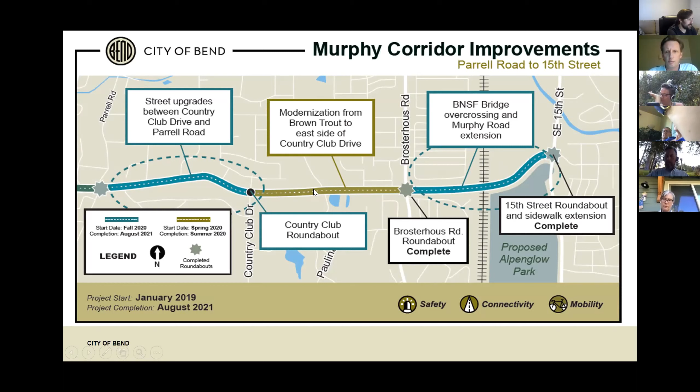Very, very wide in scope with a number of components that are not only individual and distinct, but also, based on the way the progressive design build team has decided to actually construct the project, certain pieces are sometimes split between different construction packages. So one of the terminologies used in progressive design build, or PDB, is guaranteed maximum price, GMPs. Those are essentially the construction packages used to stepwise through a project to get it designed and constructed. Generally those GMP packages were selected and recommended by the PDB team to essentially build the project in a fashion that hopefully minimizes disruption, but also makes sense in terms of the sequence of construction for the overall project itself.

So what you'll see as far as the scope of the overall project are some of the sub-projects that have been completed and that you're aware of, and also the current one that's ongoing, and then the future one that was just approved by City Council last Wednesday, which is the 5th and final guaranteed maximum price, GMP 5.

So you'll notice that GMPs 1, 2, and 3 are completed and are shown as the roundabout at 15th Street, excuse me, the roundabout at Brosterhous Road, and not shown is the first GMP, which was some early work that we coordinated with the school district on 15th Street. GMP 4 is currently ongoing, shown in the brown color and labeled as the modernization of Murphy Road from Brown Trout to the east side of Country Club Drive. I have some slides a little bit later in the presentation that show the progress of that, but it's currently ongoing and scheduled to be completed late this summer.

And then GMP 5, which is the 5th and final GMP for the project, includes 3 really important components. The first, planned for construction, is the roundabout at Country Club Drive and Murphy, shown with a dark black circle at that intersection. The second is the modernization of Murphy between the existing roundabout at Parrell Road and the new roundabout at Country Club Drive. And the third, really the keystone piece of the entire project, is the extension of Murphy Road between Brosterhous and 15th Street, between those two new roundabouts. It includes the extension, which you've seen over the course of the last year, with fill being placed for the road extensions on either side of the railroad, and also the actual railroad overcrossing bridge over the railroad.

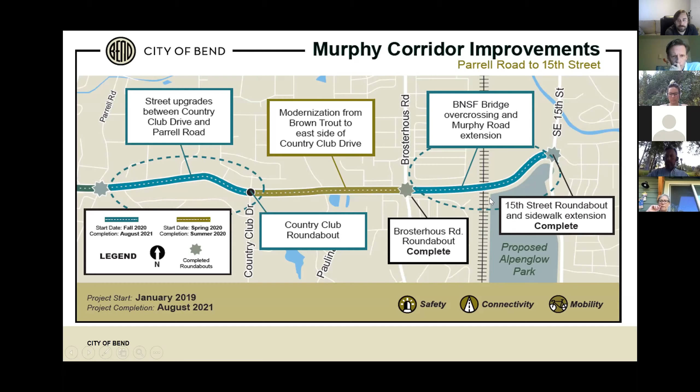The benefits for the project: it's intended to significantly improve emergency medical services and fire response times in critical neighborhoods in Southeast Bend. There's a lot of change going on in Southeast Bend, and we wanted to be at the forefront of improving safety, connectivity and mobility in that area. The keystone piece, the Murphy overcrossing and extension between 15th and Brosterhous, is key to that. It's fully funded in our transportation plan, and GMP5, the last and final GMP for the project, was approved by council last Wednesday.

Question: Is this going to include any part of the sewer extension project on Greenmont or that area? Are you referring to the septic to sewer program? Yes. There is a very small piece of the septic to sewer program where we overlap, which is the extension of the existing sanitary sewer connections along Murphy Road, extending them to meet the wider right-of-way resulting from the modernization of Murphy. Thank you. You're welcome.

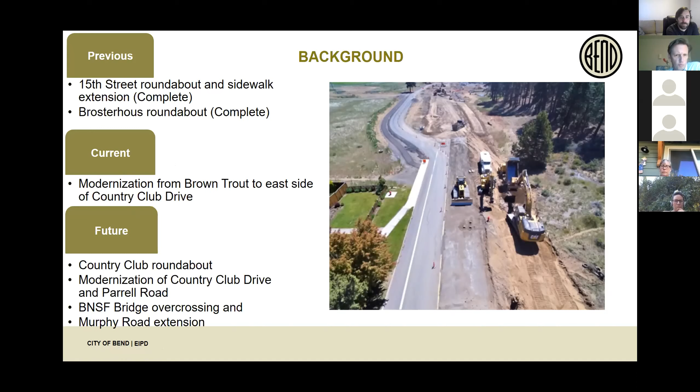Just a little more background. Previously, the two roundabouts at 15th and Brosterhous were completed as part of earlier GMPs. The current modernization of Murphy Road is ongoing between Brown Trout and Country Club Drive. I mentioned earlier the future construction: the Country Club roundabout, modernization of Murphy between Country Club and Parrell, and then the overcrossing of Murphy.

Completed improvements - just a couple of quick photographs. The photo on the left is the 15th Street roundabout, and the photo on the right is the Brosterhous roundabout. You can see the extension to the east, slightly east of the existing roundabout, which will be the extension for Murphy Road towards 15th.

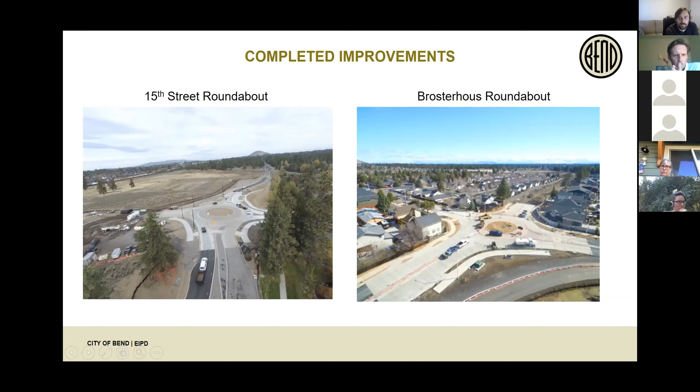A couple of aerial photos taken on Friday, July 31st, just before last, showing the modernization of Murphy Road between Brosterhous and Country Club. Paving is starting to be installed, and sidewalks, curbs, and curb returns for some on-street parking are installed. This photo on the right shows the existing temporary construction detour for that portion of Murphy. There will be a similar situation for the Country Club roundabout construction - that area will be restored after the temporary detour as part of GMP4, removing the detour and completing the improvements to Country Club. I drove through last week, and I think if you drive through now, they are doing some utility work on the west end of that portion of the project before paving can be completed.

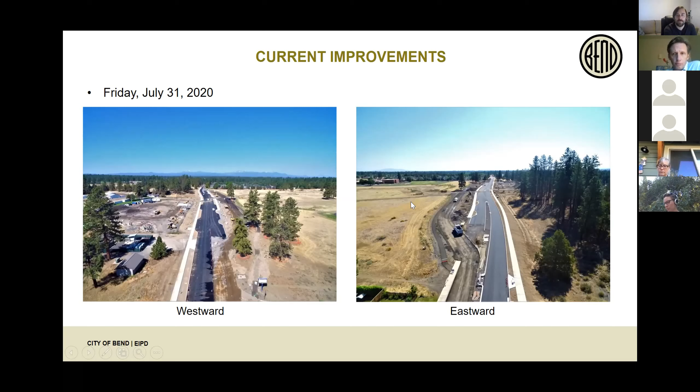GMP5 is shown here in 3 separate slides for the 3 separate components. First is the Country Club roundabout - planned to be a concrete, single lane roundabout. Note that north on this graphic goes to the left, so Country Club goes north-south but is shown crosswise here. There will be a temporary bypass road installed, with a full closure at Murphy and Country Club to facilitate construction of the roundabout. A shoofly, or temporary bypass road, will be constructed on the southeast quadrant of the roundabout, shown there with the callout.

Construction or preparation for that detour should be happening any day now, so you should see some activity out there - that's related to the bypass road construction. Part of this roundabout also includes the extension of the sidewalk on the west side of Country Club Drive to the intersection with Fairway, so sidewalks will be extended and curb ramps installed opposite the Country Club itself.

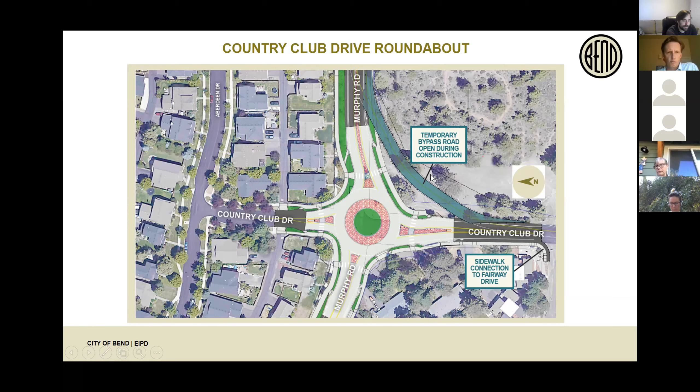The second piece is the modernization of Murphy between Country Club and the existing roundabout at Parrell. This shows the extent of those improvements. It'll be similar in that it's a 3-lane section along that stretch, including a 2-way center left turn lane, with shared use paths on both sides of Murphy Road. On the north side widths vary from 8 to 10 feet, slightly narrower at 6 feet on the south side. Lighting will be installed at each pedestrian crossing at each intersection, so each intersection will include pedestrian crossings and lighting.

There is a protected pedestrian crossing just east of Benham Road, which my understanding is the study indicated would be the location of highest pedestrian use. So that was located just east of Benham Road, and it will also be well lit. It then shows on the east end how it connects over to the Country Club roundabout.

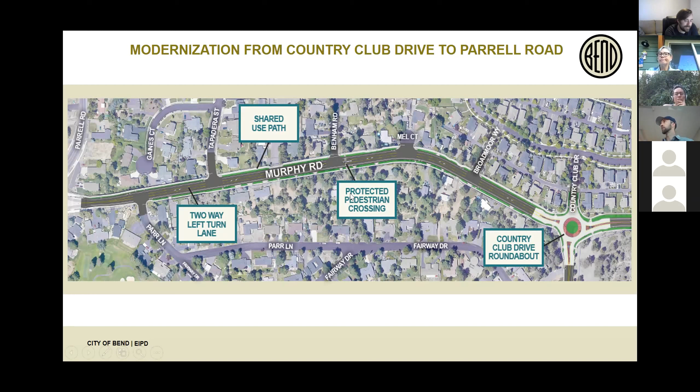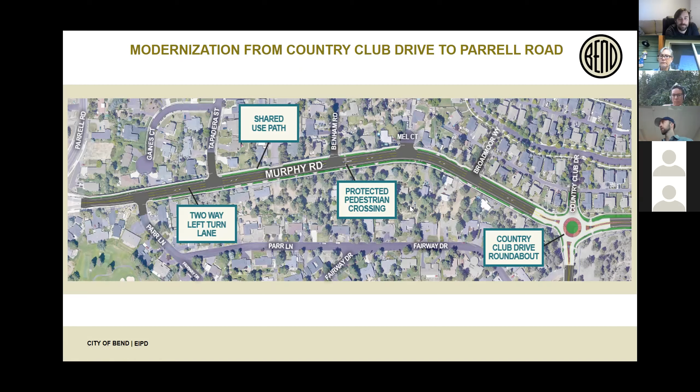Good discussion. This is why we come to these meetings, it's important to get feedback from the folks that live in the neighborhood. We're not afraid to take those tough questions. I'd like to think we have people like Garrett who can offer that long-term perspective over the whole course of the project, and we landed on a good solution.

I think I might have been done talking about the Murphy extension and bridge. I have some things I'm excited to share with the neighborhood association, 3D renderings of some of the components, particularly the bridge. I think I have 3 bridge slides, and I wanted to share these, I'm pretty excited to share them. I think they're great visualizations.

I will say these are based on an incomplete design, so again, that's the nature of the beast with progressive design-build delivery. Things change as we get towards construction and even during construction. We'd like to think these renderings show the character of the improvements that are going to be constructed; otherwise we wouldn't share them. There might be slight adjustments here and there, but I was more excited to share the slides than to hold back just because we're not at 100% design.

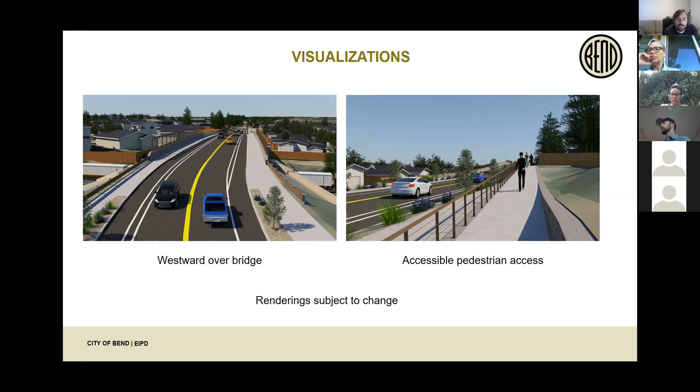To the right is the accessible pedestrian path, access to the Hidden Hills neighborhood that I talked about earlier. This is a view looking eastward, up the ramp that connects with the sidewalk, essentially where the person took the vantage point for the rendering. On the other side, to the east of the ramp, is a staircase, so those who prefer to use stairs have that option as well.

The third rendering I wanted to share was an east-looking rendering showing again the top of the bridge, wide sidewalks, buffered bike lanes, the train crossing underneath, and some space to the east for a potential future Bend Parks and Recreation District path. It also shows the large fill that gets the road up to grade as it goes westward from the existing roundabout at 15th Street, and the gravel road I pointed out earlier for access to the existing southeast interceptor manholes.

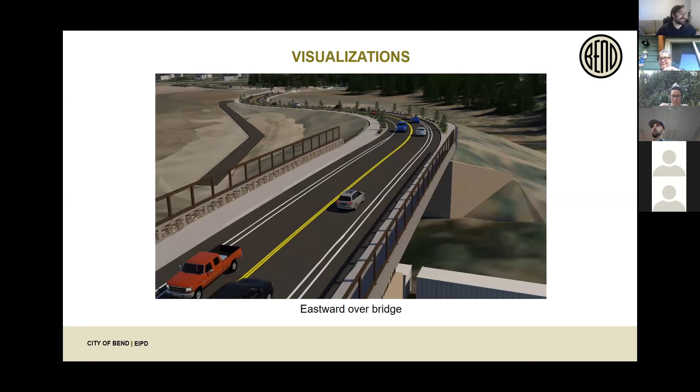We've got a couple more comments. Kent mentions that the roundabout at Brosterhous is pretty tight for his pickup truck, which speaks to that being our future expansion point, I think. Nancy mentions that a 15-mile-an-hour speed sign should be posted before the Brosterhous roundabout. Does anyone else have questions?

I think so. The first question about the truck, both those questions were about the Brosterhous roundabout. Is that correct? Yep. Yeah, and that's kind of the yin and yang of roundabouts.

So they're designed to limit entry speeds and exit speeds so that people aren't going too fast through those roundabouts. Really the most efficient design for a roundabout is one that allows all legs to enter on a fairly equal basis, if possible. And if speeds are too high, you'll get a preferred leg that'll establish a line of traffic through there that, due to speed or volume, precludes other entry points from working very well. So by design, they are designed to limit the entry and exit speeds for the roundabout.

Which also means that the turning radii is one of the ways engineers accomplish those limited speeds. Quite frankly, those two questions are a great example of the feedback we usually get at roundabouts, that either the speeds are too high or the corners are too tight. So it is a balance between those.

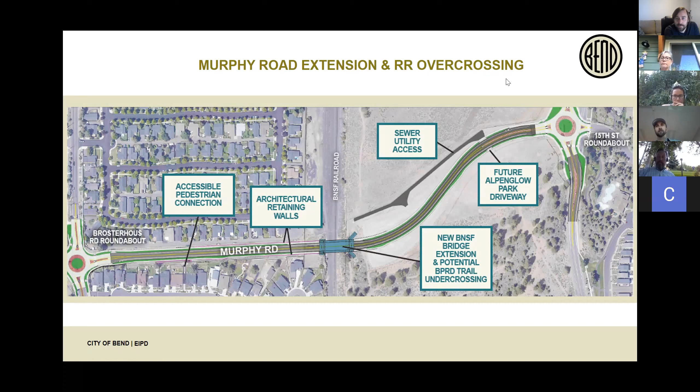We've got a few big things. First up, treasurer's report, nothing really major there. We spent $120 in the past month on Facebook advertising.

That was connected to the 4th of July fireworks safety signs, and we did that in a way that created awareness around the signs and helped us get people to sign up for the newsletter and participate in our meetings and everything we do here. It's really a drop in the bucket. Our current balance is over $12,000, so we plan on doing some more online outreach and engagement and putting some money behind the efforts as well.

Part of it is we want to do some diversity outreach as well, so it's not the same beautiful faces that we see here every time. We want to be a little more strategic about that, and we have the support of the board to spend money to make that happen. But this past month, nothing really major to report aside from that.

I was hoping that Karen, our land use chair, would join. I don't see her on the call, so I'll try to summarize some of the things here. I'm going to go ahead and share my screen. We've got a few items, so let me pull this up real quick.

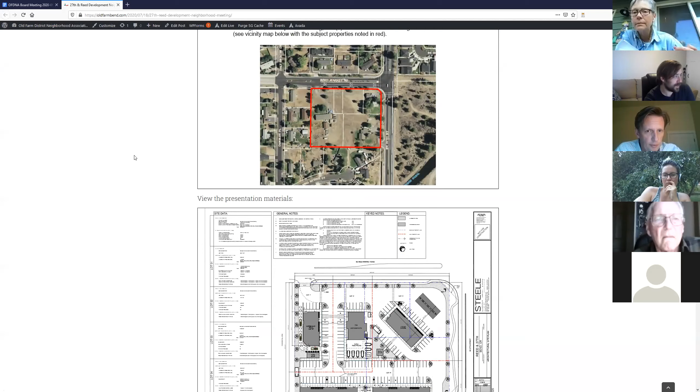This is the lot at the corner of Reed Market and 27th on the southwest corner. That is one of the very few lots that is zoned for commercial development in all of the southeast, apart from the expansion areas, like the elbow and such. Pretty much we have that, something on Murphy, the American Lane stuff, and there's not much commercial opportunity at all in our area. So this is one we all kind of expected to be a gas station.

It's going to be a gas station, along with some other things. From the looks of it, it's kind of like over on the west side where the bottle shop is - there's a gas station and a little complex of a tiny strip mall in there. This is something similar to that, with a little strip of some other services like a drive-through coffee shop.

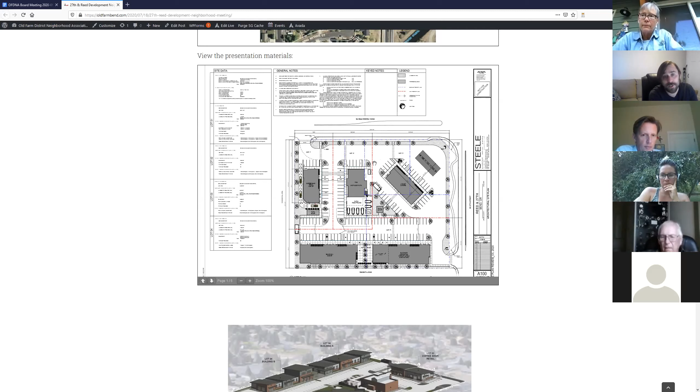When I was able to chat with Karen and James DeRofi, our chair, about this, they saw no serious objections. This looks like pretty much what we expected would go in this lot and does appear to be a pretty sound approach. I think James mentioned something about supporting electric charging vehicles, which is a concern broadly shared as we look to expansion on that side of 27th, creating the infrastructure for the future. But otherwise, no serious objections here from the board.

We've got an elevation here showing what it's going to look like. You can see in the background that little strip mall, and pretty decent parking for something of its size. I think getting in and out of this is going to be dangerous. Yeah, that's really the case for anything that goes there.

And there's no housing at all in this, right? They don't have to put any housing above or anything? Is that right, there's no mixed use? I don't believe so, strictly commercial. Yeah, I think this one is strictly commercial. But it's a really dangerous spot. I was driving through there trying to figure out how they're going to get people in and out of it, and I'm still befuddled by it.

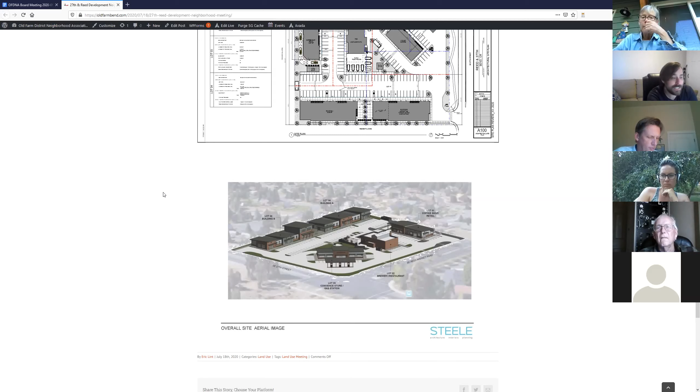We're dealing with the scraps now, kind of like with Luderman Crossing at 15th. Those exits and entries are going to be funky. That's a kind word. They're going to be flat out dangerous.

Eric, are you seeing the comments on the side regarding the flag lot? Yep, from Connie and from Cheryl earlier about the ADUs. We all kind of expected ADUs to go into this big neighborhood, but they didn't really make explicit that subdividing would be something we can expect. Folks hear that it's zoned for large lots and think that it's always going to be that way.

It looks like it's going to go this direction now. I do not accept that. Y'all need to make some noise about this.

Connie mentioned that actually having some commercial development on the 27th corner could cut down trips to go to other places, like if you have to go to 15th or the Costco area. And that's something we've been advocating.

Lisa asks, when was subdividing approved and what can we do about it? I believe that's something they can do by right, so long as it still fits within the zoning specifications for that lot, it can be subdivided. If the two lots that are created still fit the zoning requirements, then they can do that, and there's honestly not a whole lot of recourse.

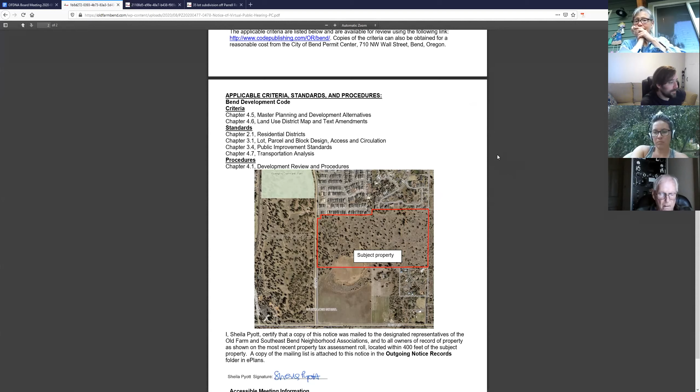So we previously discussed this when they first submitted the application. This is going to make some amendments. I believe Karen is on the ball, she sent me some emails indicating that. Do we have any comments on this one?

This just breaks my heart, to have all that land that's just been decimated and every tree taken out, and now they're going to do it again. Yeah, and the request is to remove a planned connector street that goes to the southeast area plan. I am not sure what that entails, so I really wish our other guys were here.

James recently attended the southeast area plan committee, so we'll get to that in a sec. But I'm not sure what that means. I hope they're not taking out connections, because that means it's going to force more traffic on 15th. They're going to go on 15th anyway.

And the last part here, I don't have the documents, but Karen had some extensive comments on the code amendments. There are proposed changes to the Bend Development Code and some of the other stuff that goes along with it. It's responding to state legislation that was passed relating to density requirements.